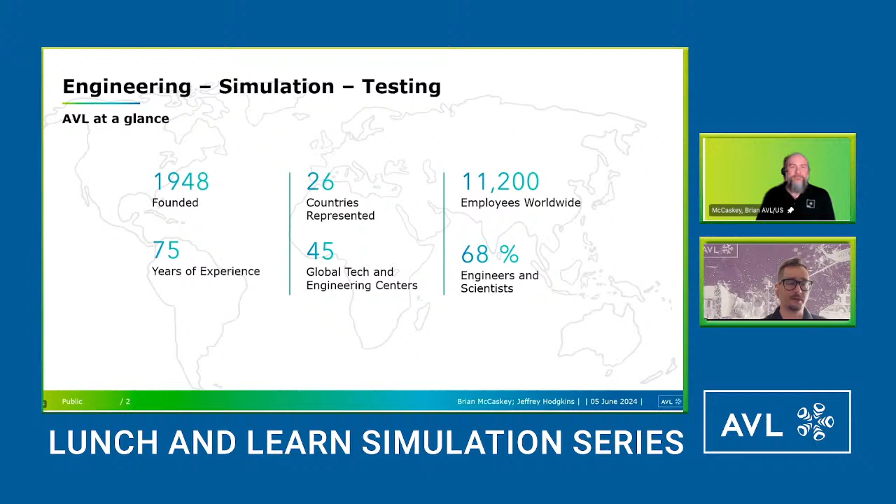Let's jump into the topic with a quick overview of AVL, who we are and what we do. We are a very research focused company, 68% scientists and engineers with 75 years experience in the mobility industry and beyond. We are all over the place, and Brian is joining us from the Plymouth, Michigan office today. We are both with the simulation group, and we have a quite large portfolio of tools you can try. But today specifically, we will be talking about a problem that we solve in AVL Excite. AVL Excite is a multi-body mechanical simulation tool, very established in the market, and we will be talking about a noise problem.

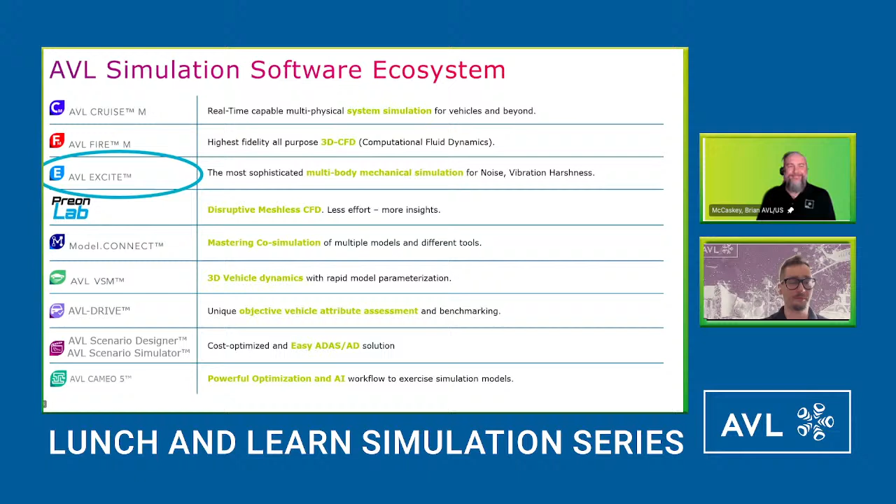Thank you, Jeffrey. Glad to be here today. Just a little bit of an overview here: I'm going to talk about the big idea for today, discuss a few of the Excite-M features and results, show the Excite-M model for this particular exercise, some of the results, and then go into some of the post-processing options we have within our tools for root cause analysis.

The point of this presentation was that we combined forces with a company called VI-Grade, who have an NVH simulator. We conducted this simple exercise to prove out the transfer of Excite NVH results to VI-Grade to be able to auralize the noise results.

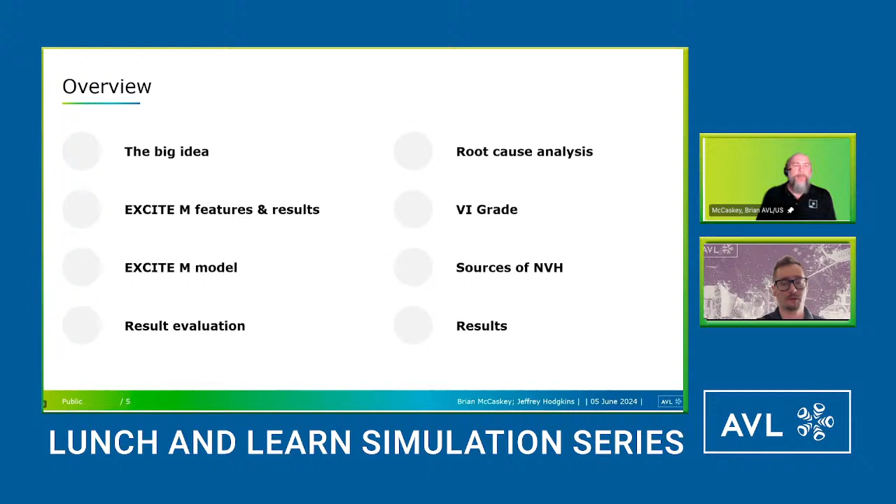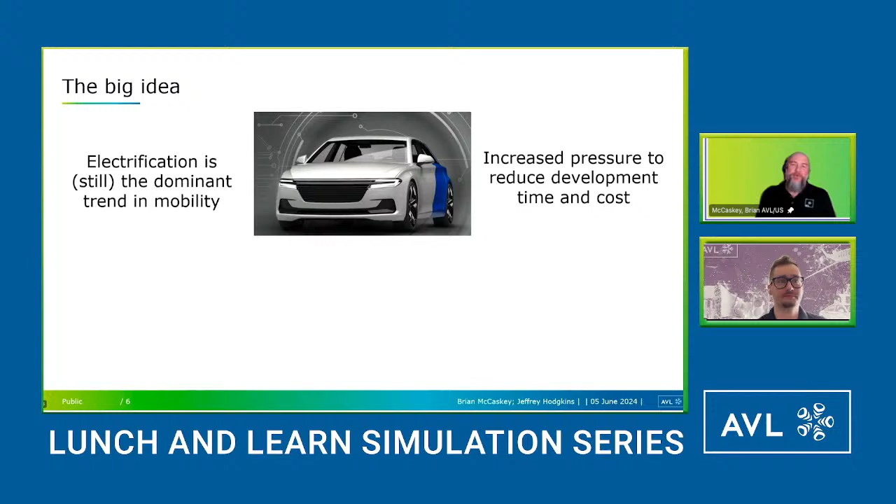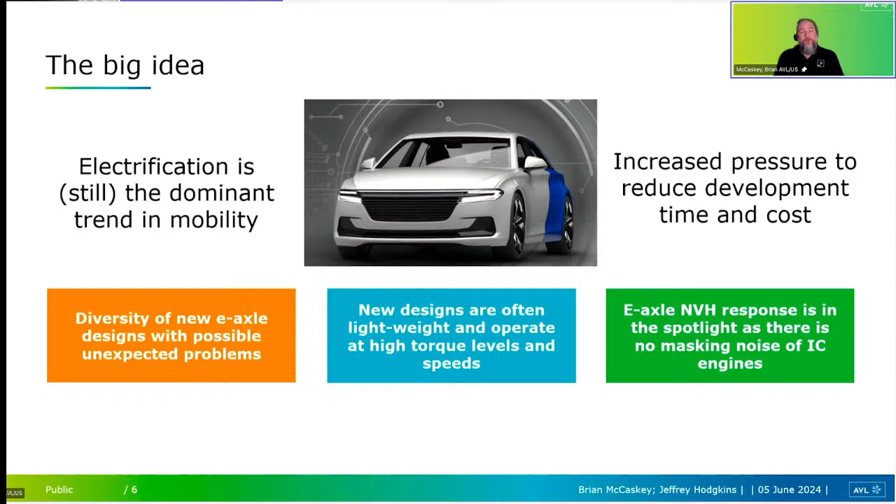Thank you, Brian. So the big idea: whether we like it or not, electrification is still the dominant trend in mobility. With that comes increased pressure to reduce development time and cost. The diversity of new e-axle designs brings unexpected problems, things we haven't really thought about yet because this is a new sector for many of us. These designs are often lightweight and operate at high speeds and high torque levels, which can have their own associated problems. Because we aren't masking these motor and transmission noises anymore with internal combustion engine noise, the NVH response is now very much at the forefront of these development tasks. So what we need is a simulation approach that can accurately capture the dynamic effects of e-axles to overcome these challenges in electrification.

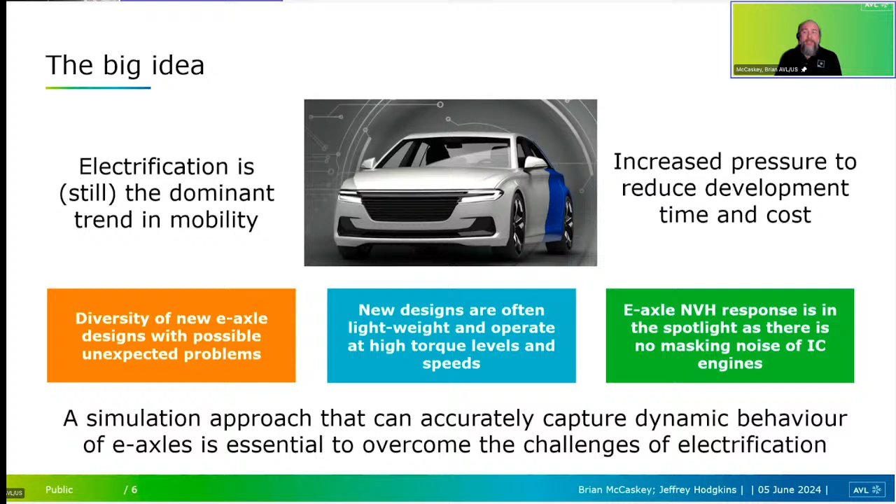Engineering: old is new. I've been an engineer for 30 years, and for those 30 years I've been leveraging development and technologies that have come from over 100 years of development in the internal combustion space. It's exciting to be in this new frontier of technology, because we are on the cusp of developing new technology that will be moving forward for the following decades, and it's nice to be at the beginning of that.

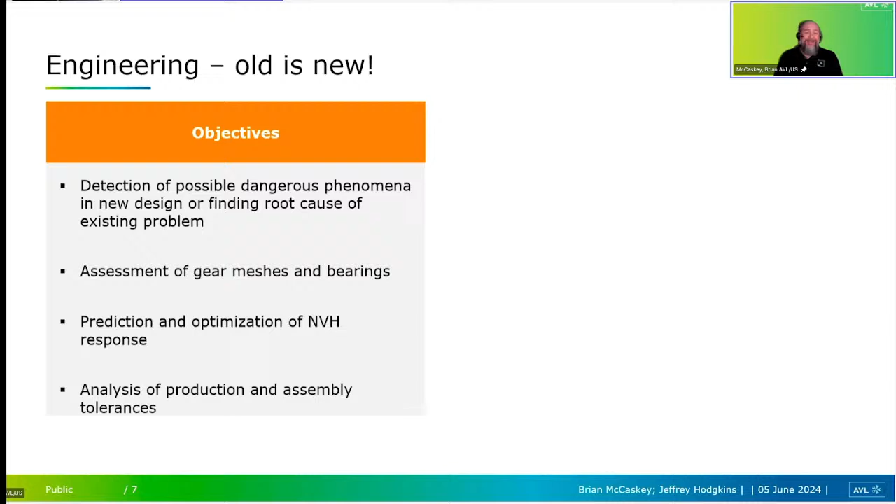Some objectives we want to achieve while developing these techniques: we want to detect possible dangerous phenomena with these new designs and find the root causes for these problems, since this is a whole new ballgame for many of us who've been in engineering for 30 or 40 years. We need to assess gear meshes and bearings, and we need to predict and optimize our NVH response, understanding where these sources of noise, vibration, and harshness come from. Finally, because we have many problems with production and assembly tolerances, this is an area we also need to evaluate and include in our simulation models.

So, of course, benefits from this mean that we can increase our confidence in our designs way before we even produce any kind of a prototype. Again, in my old days, I remember that just putting together a mock-up of an internal combustion engine was several $100,000 just for one engine. I'm sure it's much more expensive now.

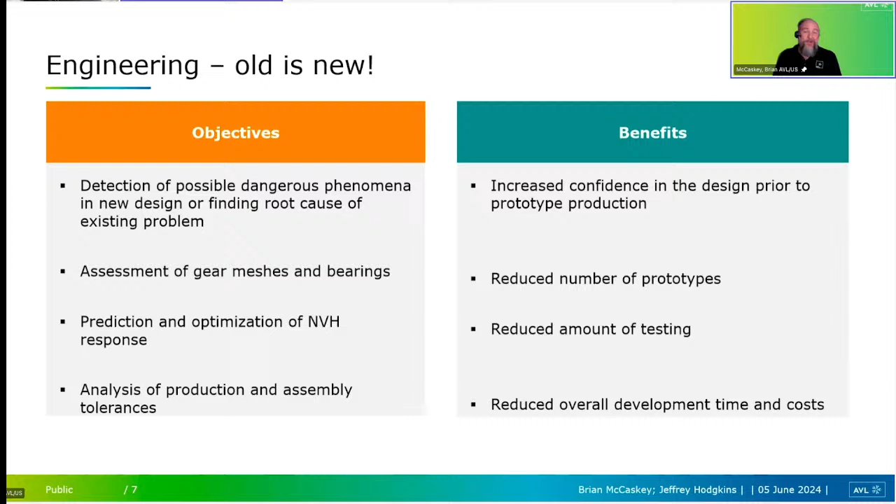So we can reduce the number of prototypes because of this. We can also reduce the amount of testing as well. Of course, that reduces overall development time and development costs, which is an important part of what we're doing in the engineering space today.

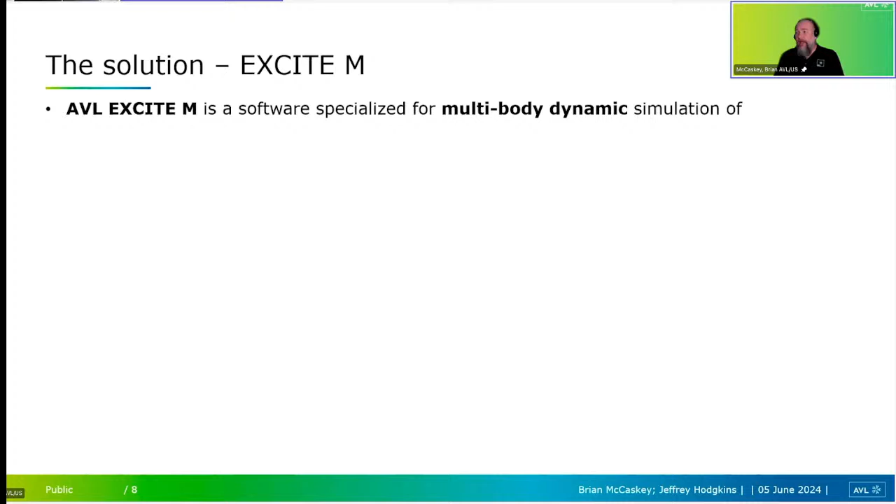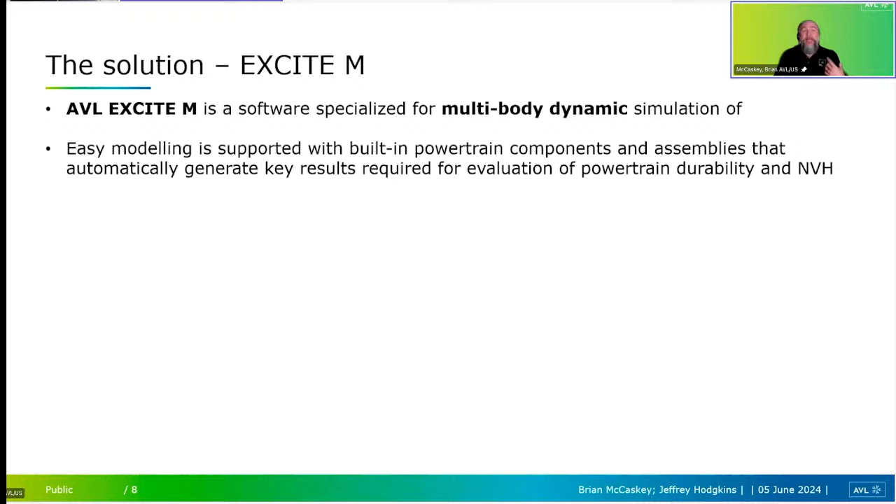So the solution that we here at AVL have is called Excite-M. Excite-M is a software that's specialized for multi-body dynamic simulation of powertrains. We have easy modeling that's supported with built-in powertrain components. We have assemblies that can automatically generate key results that we need for our powertrain durability and NVH.

And then, of course, because we started out in the ICE space and we have expanded into the electrical space, we can evaluate any kind of powertrain system. So whether it be pure ICE based, some hybrid, or even a pure electric powertrain, we can simulate that as well. And these are some screenshots coming directly from our tool.

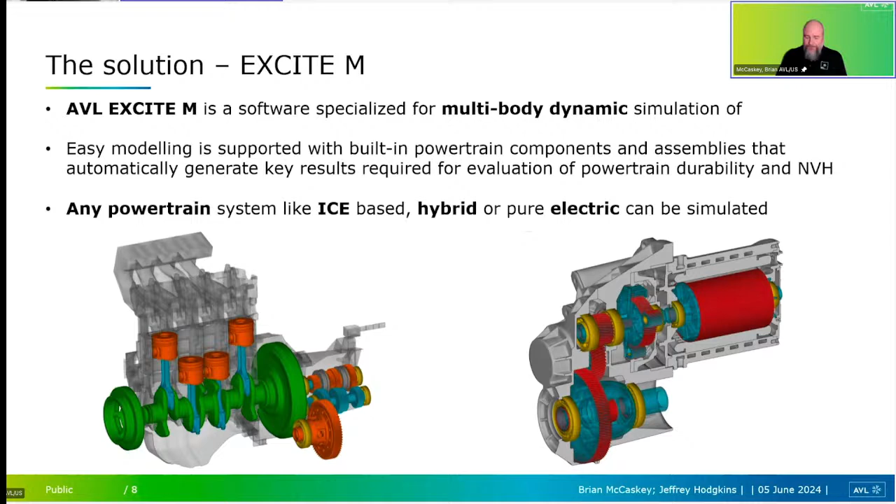So Excite-M allows us to create the so-called virtual twins. And this virtual twin is a high-fidelity dynamic simulation model. It allows us to be able to optimize and validate things in the virtual environment, which, of course, is going to save us time and cost.

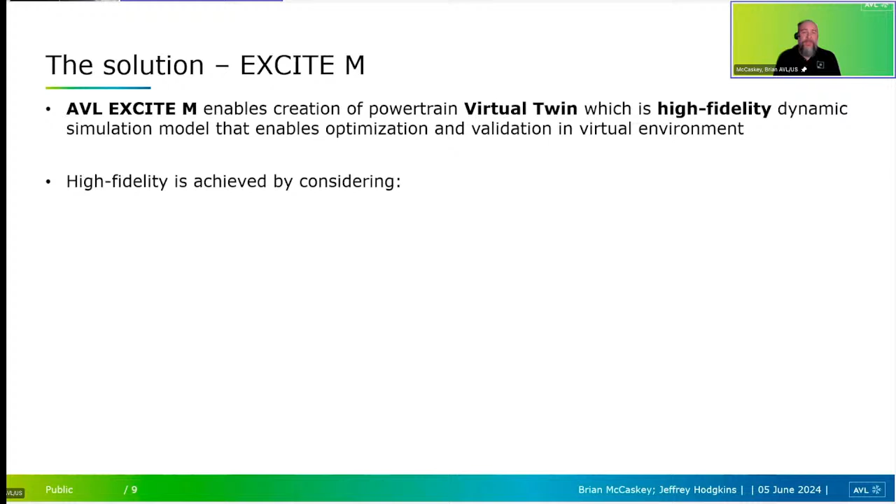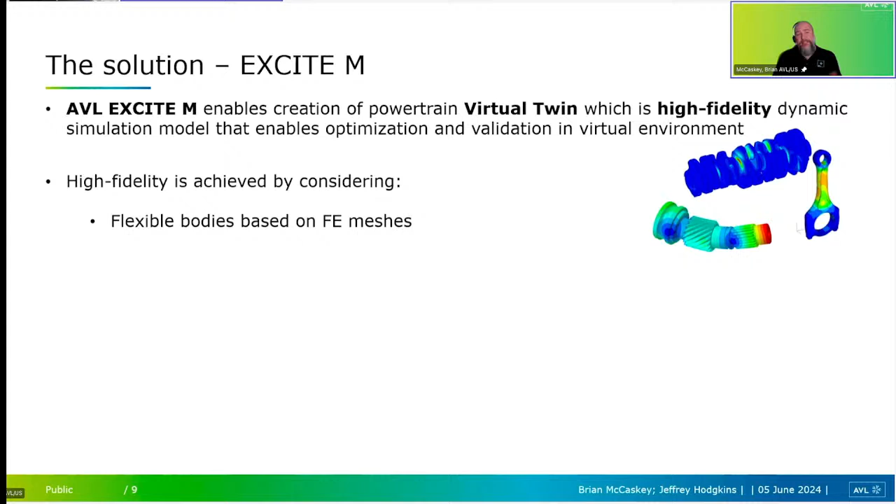So how do we do this? We do this by using fully flexible bodies based on finite element meshes. So you can see on the right-hand side, we have several components where we do some work inside one of the FE tools to provide this information as input to Excite. We have a time domain solver that enables us to investigate all the nonlinear interactions, whether they be from the gear contacts, oil film bearings, or other components.

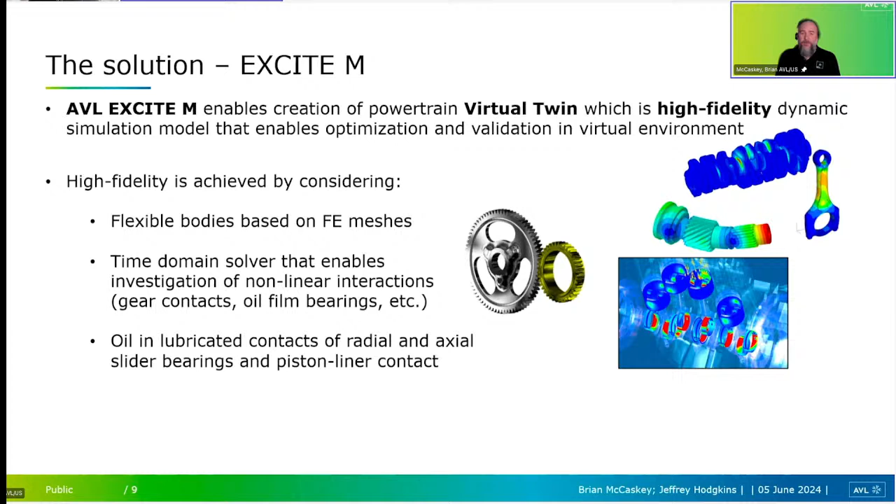We can also consider the oil in lubricated contacts for radial, axial, and piston liner contacts. And then finally here, we can consider the electromechanical interaction within e-motors as well, which is, again, something we're really focusing on in the mobility space today. And just to be clear, all these effects are considered simultaneously in the AVL Excite-M dynamic simulation, just as it's occurring in the real-life operation.

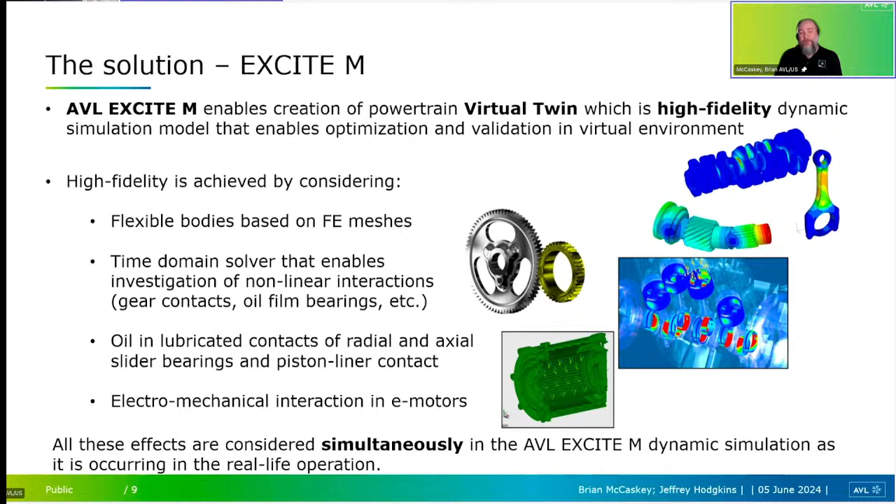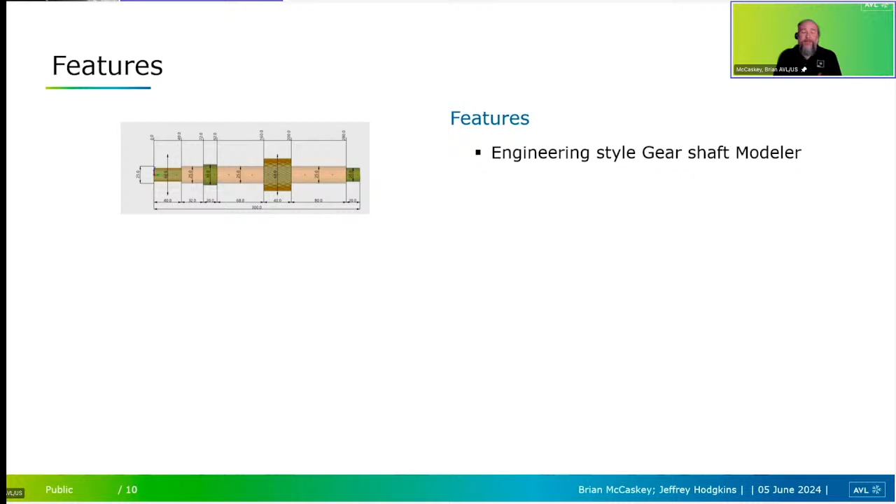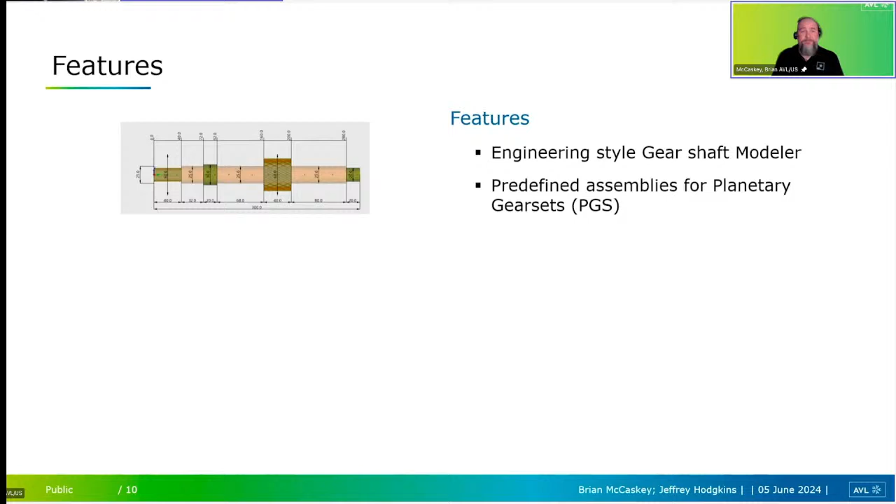So what are a few features of Excite? So Excite has an engineering style gear shaft modeler that allows us to define our properties, our assembly dimensions directly like we would see on a print. We also have the ability to insert predefined assemblies for planetary gear sets or even internal combustion engine assembly. We have preset internal geometry that's based on boundaries and reference dimensions.

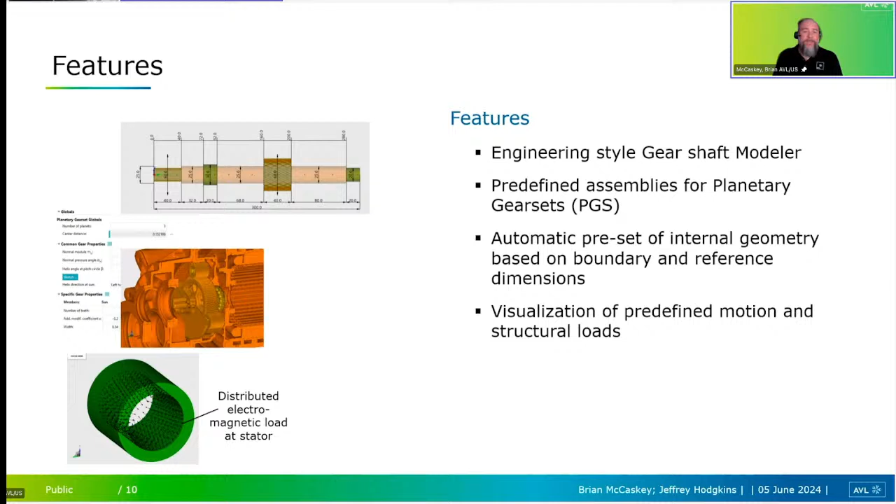We're able to visualize predefined motion, be able to look at these structural loads. So we can see in the animation here, the kinematic animation of our planetary gear set under operation here to give us an idea of whether we've got our initial conditions and our boundaries set up correctly for this particular simulation. And then down below, we have our distributed electromechanical load specified on the stator.

And then also another nice feature is we have so-called focus and context view technology. So we can look through slices of our components to be able to see what the dimensions are and be able to change those very easily and quickly and get immediate 3D feedback in our viewer.

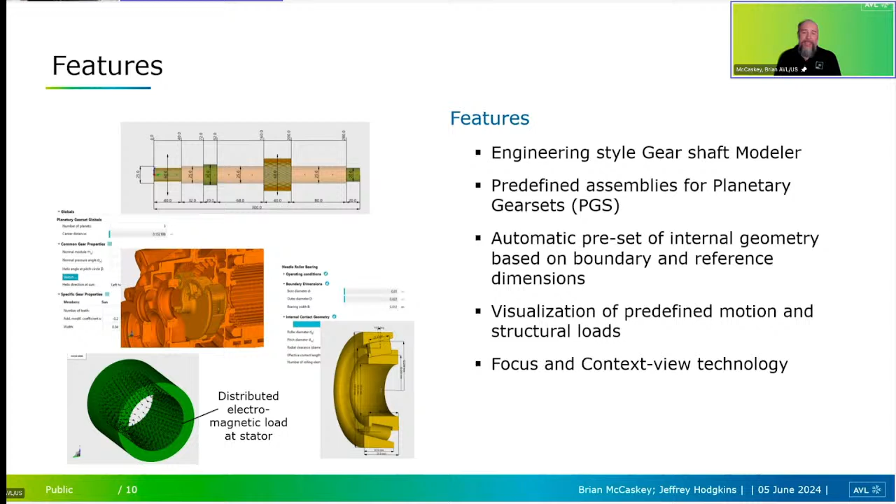So the next question, of course, what are some of the main results that we can get out of Excite-M? So from an NVH standpoint, we can specify virtual accelerometers and be able to measure the acceleration at specific points to be referenced to, let's say, real testing locations on our testing facility if we need to. We can consider coupled bending and torsional vibrations and be able to get those out of the simulation. We can look at mount bushings and vibrations.

We can consider the rotor dynamics, structure-borne noise, what are the velocities and accelerations of the structure, and then also the airborne noise as well. So we can see here on the right-hand side, we've got some screenshots showing some structure-borne noise of a housing of a motor, and then showing the overall airborne noise that's just emanating onto this 1 meter sphere in space.

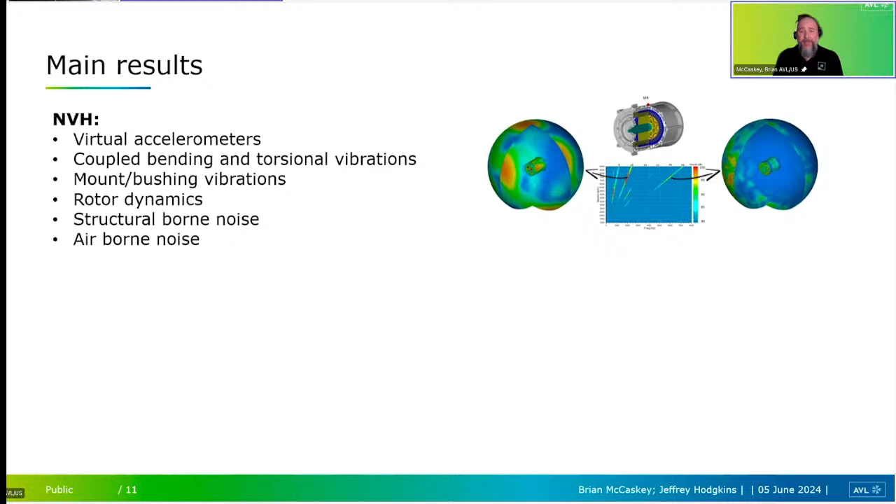Other things we can consider are the gears. So we can consider gear meshing forces. We can consider rattle, whine, clonk. And you can see on the right-hand side here, we have a nice Campbell plot showing the effects there, showing rattle in the wider frequency range, and then, of course, seeing whine in that single narrow band range.

We can consider dynamic transmission error. We can look at loaded tooth contact analysis and also consider power losses.

And then finally, just to round this out, from the bearing standpoint, we can examine bearing forces and moments. We can look at raceway deformations and also see power losses. And we can see on the right-hand side again, we've got the radial contact forces at the rollers themselves. And we can also look at the order plots to see where the transmission error and forces are coming from.

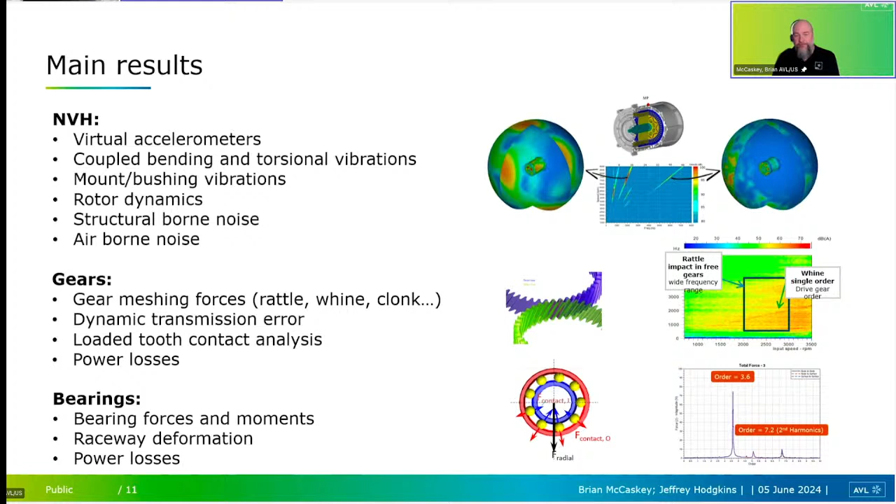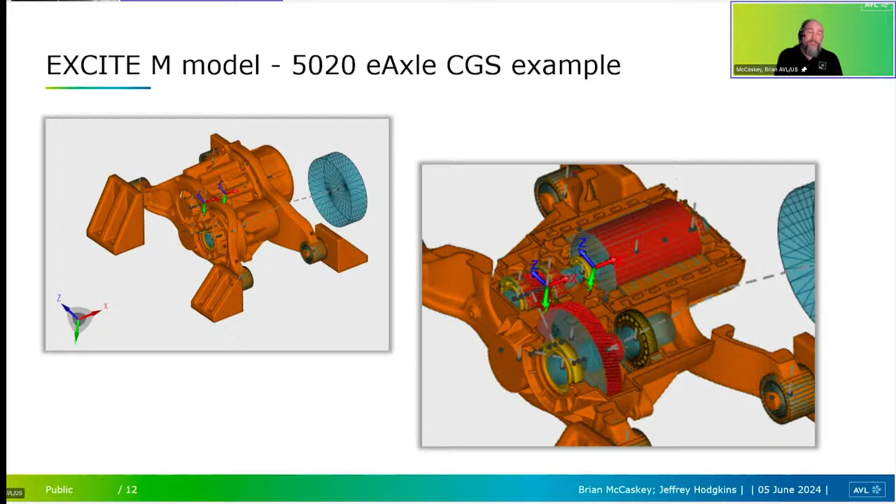We've got an electric motor. We've got a 2-stage gear here, and then, of course, we've got a dyno-type driver on the outside that's moving this at a specific speed. So, as I mentioned, it's a 2-gear reduction, and what I did is I utilized a single loading condition and ran this from 1,000 RPM to 9,000 RPM at 1,000 RPM increments, and I used 2 different variants.

So one of the nice things about Excite is that you can easily change the microgeometry of the gearing to be able to see what the influence might be. So in the base model, I used just regular gear geometry as it would come machined, let's say. And then I used a secondary variant, which was gear crowning with a microgeometry of 3 microns. And what I wanted to do was to really see within Excite, just with this basic model, what is the impact going to be of this modification?

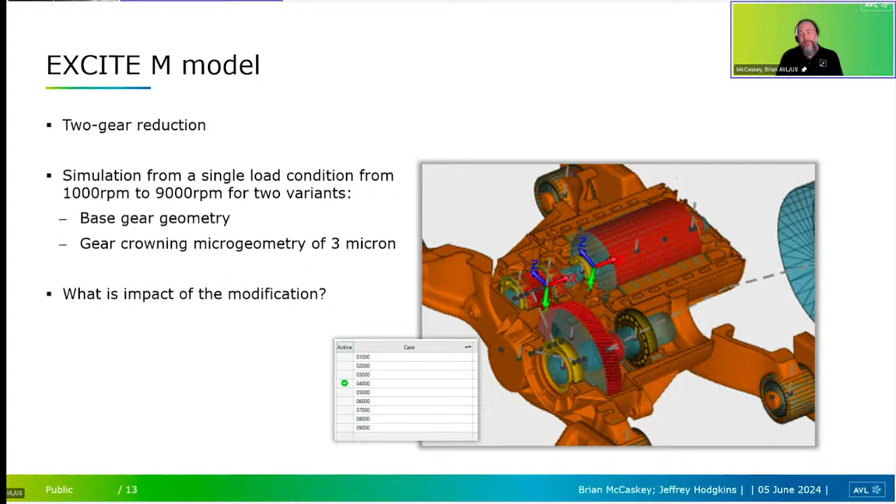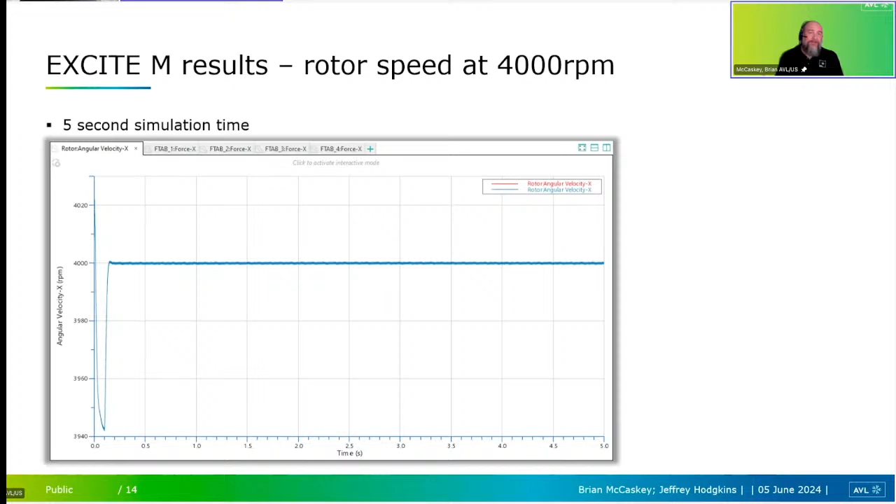So here's just showing you the rotor speed at 4,000 RPM. I just chose a random speed here just to show the result that once I got through my initial conditions, after a few milliseconds, the simulation was steady state up until the 5-second range that I ran the simulation under. And what I wanted to do is to be able to export the mount excitations and provide those to VI-grade for this exercise.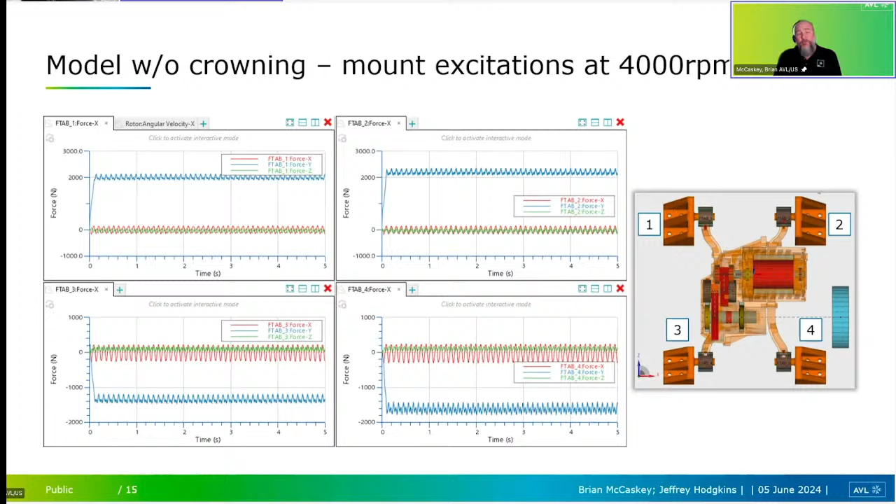And if I move to the model that had the crowning, you can also see that the forces are very, very similar. So at least this gives me some confidence that I don't have anything wrong in my model and that really the microgeometry isn't affecting something on a very large level. So I want to dive into that a little bit deeper.

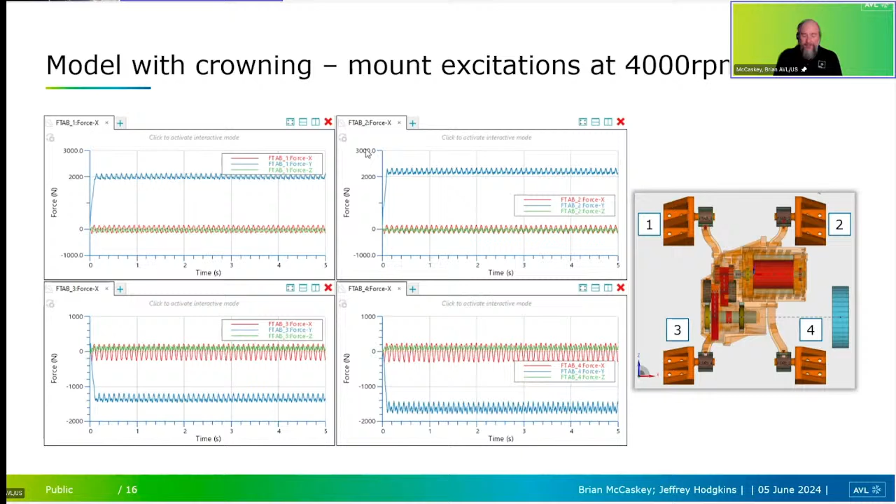So that's kind of where I wanted to place my focus and say, okay, what if I look at the results that have the crowning included? Can I really see over the frequency range some differences there? So the next slide here shows that, and you can see for the 14.64 order that there is some decrease there. And for the 27th order, you can really see that the order content there has reduced fairly significantly, at least from the eye standpoint.

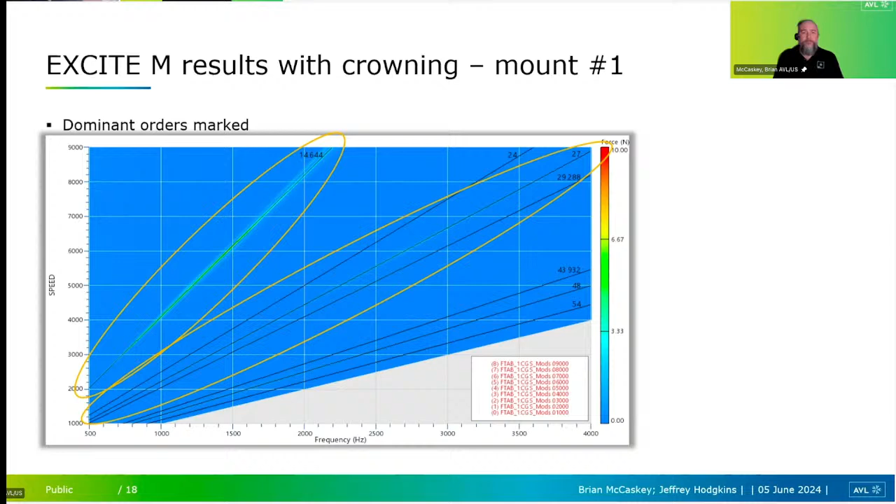And I can go further and look at order tracking. So I can track those individual orders for both the baseline and the modified gear tooth microgeometry. And I can see that there were some differences between the baseline and the modified example. So again, I can have some confidence knowing that I've had some impact here in my simulation to better the whine noise that's in this model.

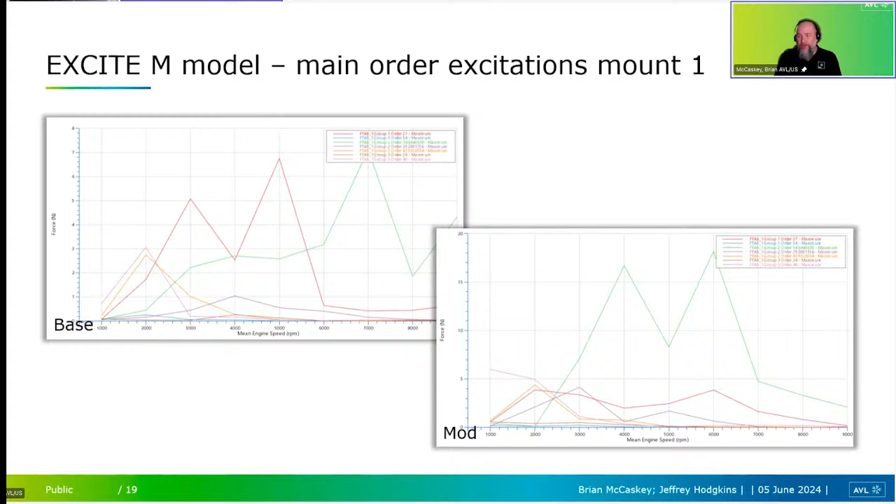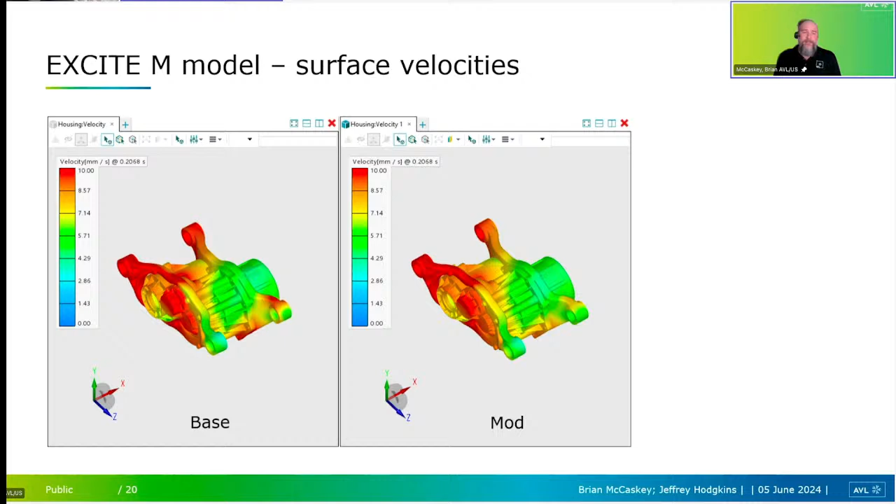And furthermore, I can look at the animation, the 3D animation within our post-processing tool. And again, with this, you can see the baseline and the modified at just a specific point in time. And you can see at the right-hand mount point, for sure, that there is some difference there with respect to the overall velocity at that particular location. So I know that I'm getting some influence and I'm getting some benefit from utilizing this gear microgeometry on the structural vibrations.

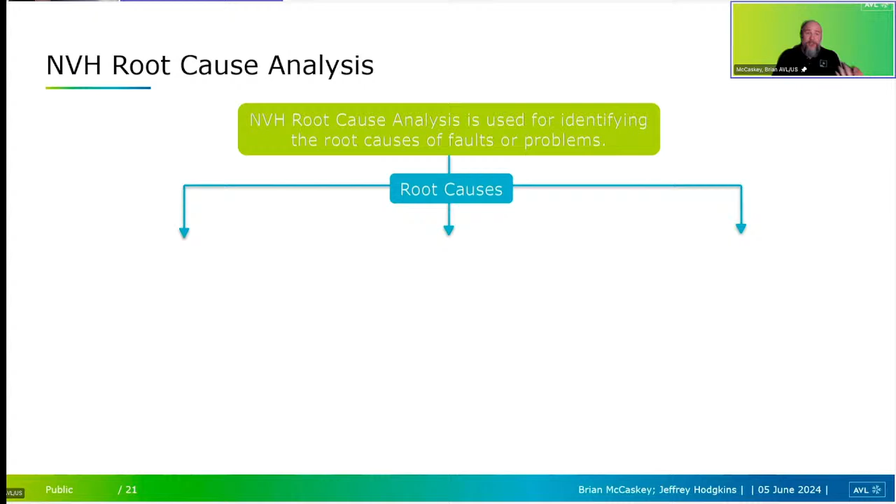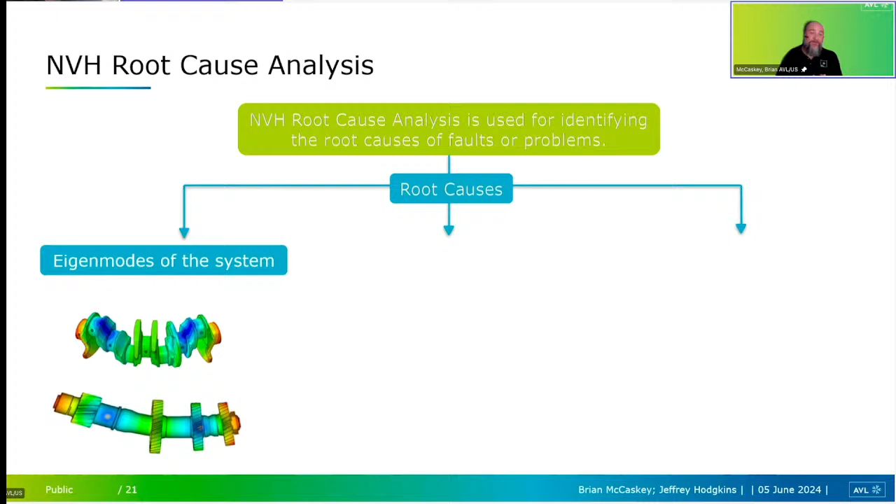So furthermore, what I could do is I could do some root cause analyses. These root cause analyses allow us to be able to understand maybe where the faults or the problems are coming from. And it can be very complicated, and it can come from several different sources. So first of all, it could be coming from the eigenmodes of the system. It could purely be coming from some resonance point with a bending or a torsional mode of a shaft or of a housing. It could be very simple like that.

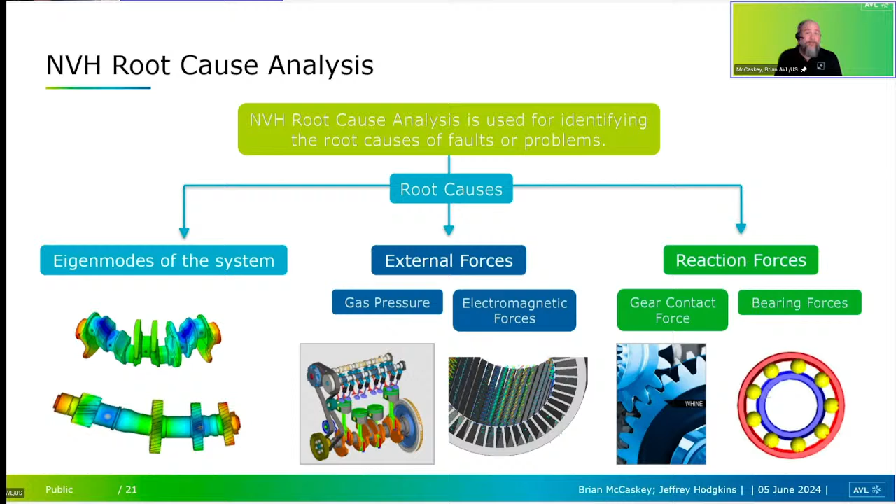Or perhaps it's coming from the external forces. In the internal combustion area, it could be coming from the gas pressures, or maybe in the E range, it's coming from the electromagnetic forces, maybe providing some ripple or some other modes in there that we're not really expecting. Or finally, it could be coming purely from the reaction forces. Maybe it's in the gear contact force. Again, we've been talking about gear whine. Or maybe it's coming from the bearing force. Maybe there's some sort of rollover that's occurring that's causing some of the faults or the problems that we're experiencing in our model.

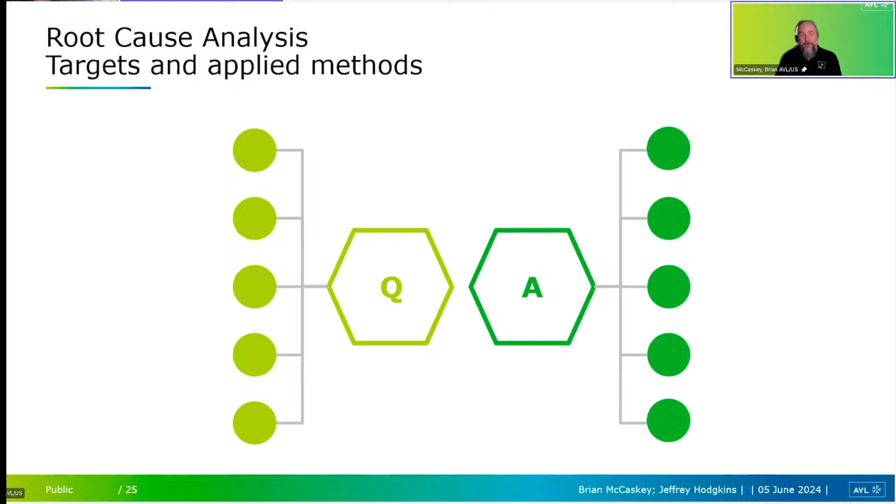And we can go even further into this. We have several different methods that we can utilize within AVL to dig down and try to understand where these root causes are coming from. So, for example, what is the deformation shape of the resonance itself? What we could do is a so-called operational deflection shape analysis. And what this does is it allows us to look at the actual bending and flexing of the component, whether it's the housing or the entire system, to see really what is affecting a particular portion of our model.

We could also look at what excitation path is causing the resonance. We could do a numerical transfer path analysis and really dive in to see what modal content is really driving that resonance that we're seeing. Another thing we could look at are the eigenmodes. What is happening at the resonant frequencies? We could do an operational modal analysis and really deep dive into the structure and see exactly what's going on there. Or even on a system level, what mode is contributing the most on the resonant vibration.

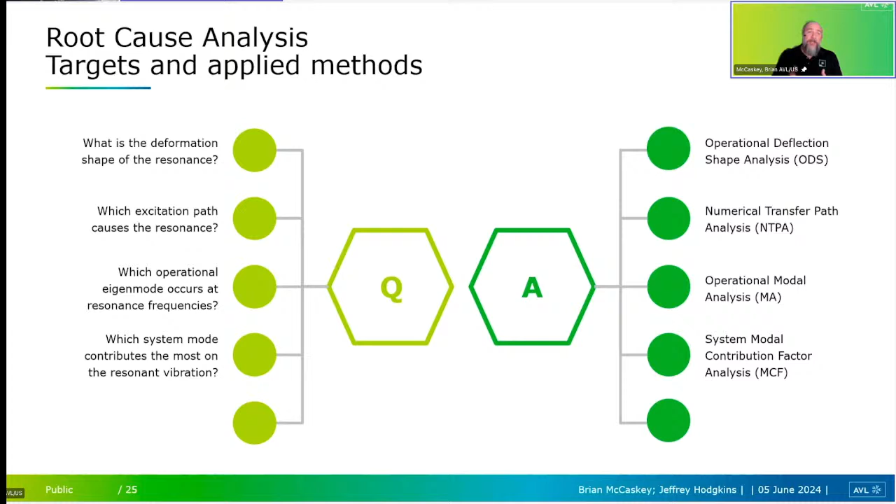So we could do a system modal contribution factor analysis where we can actually look to see what dominant mode is affecting the result of our simulation. Or finally, what component mode is contributing the most on this resonance. So we could do a modal contribution factor analysis as well. So these are just a few of the tools that we can use from a post-processing standpoint to be able to understand more clearly what is going on with our simulation model.

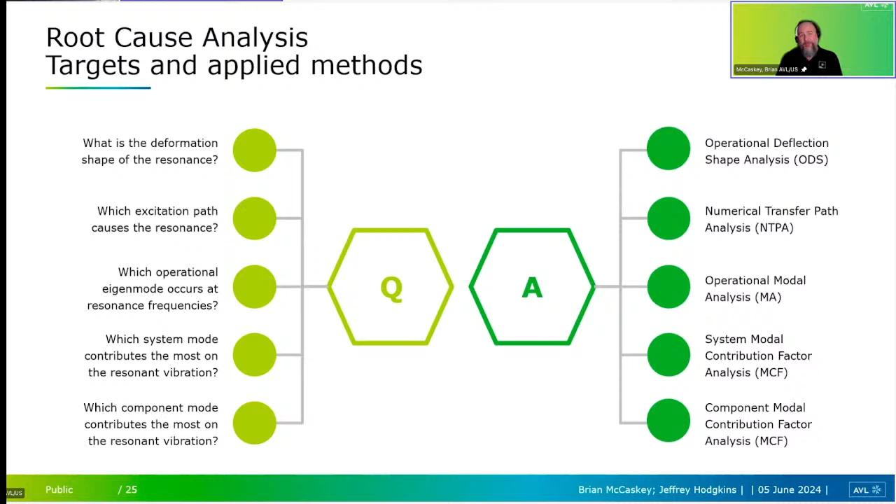But when we get to this point, we kind of asked ourselves the question, and this is where we transition a little bit into what VI-grade can offer. What do we do next?

The whole idea was to try to auralize, or be able to hear by ear, what the Excite-M model was doing from one baseline model to the optimized model with the gear profile modifications. So again, we connected with VI-grade, and their mission is to help customers with zero prototypes.

So a little bit about NVH. This came from our friends there at VI-grade. Basically, there are several different areas where we see automotive sound and vibration, from 0 hertz up to 20,000 hertz.

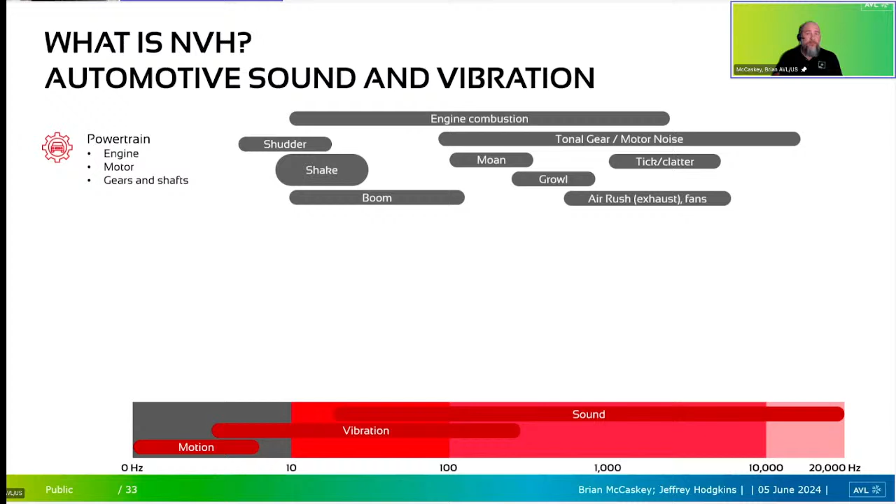What we can see here is that in the powertrain, we typically have these type of responses that are dominating. Maybe it's engine combustion, maybe it's tonal gear and motor noise, maybe it's boom, shake, or shudder - all these things that we've heard about in our engineering days.

Or maybe it's road noise. Road noise is a big thing. It could be coming from the tires and the tread, or from the structure-borne sound and vibration, or maybe some imbalance.

And then finally, wind noise. Wind is another thing that we don't really think about when we're driving, but really we get that whistle, or we get that effect that happens through maybe our trim package, for example. I've got an older vehicle, and it's very noisy - I can really hear the wind some days.

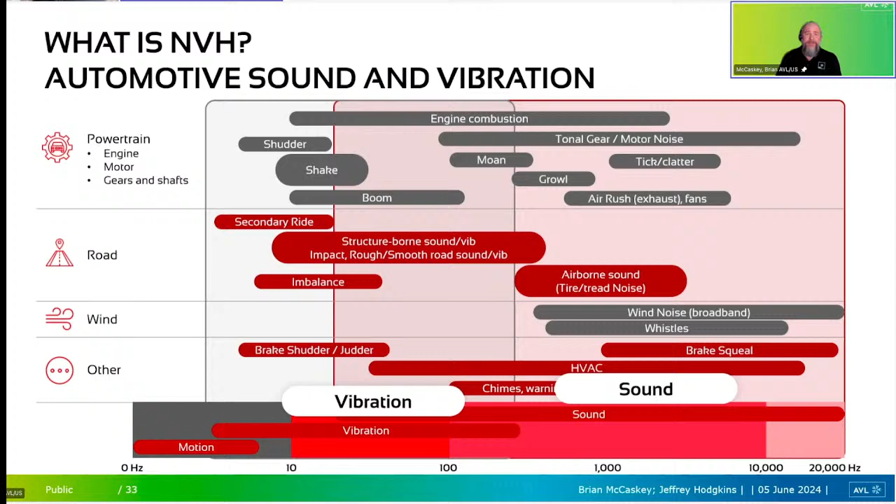And then finally, brakes, squeals, HVAC, chimes, warnings, communications - all these things are contributing to automotive sound and vibration. Primarily from a sound standpoint, we have this area on the right-hand side, which are mainly your higher frequency orders. And then on the other side of it, we've got vibration. There's a little bit of overlap, up to maybe 100 or 500 hertz down to zero for motion, and those are really where our sound and vibration are coming from.

So why is this important? Of course, today especially, if you think about it, think about a Harley Davidson or think about a Mustang. They have a very specific sound that feeds into their brand DNA that they really want to try to deliver. When you hear something going down the road, you're like, oh, that is exactly a Harley Davidson, or that's a Mustang or whatever.

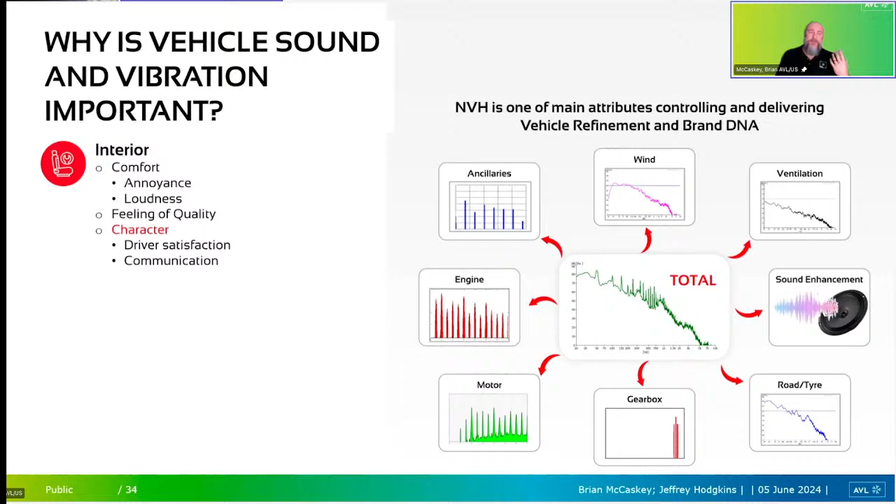That's really where today we have to be careful, because there are not the typical sounds that we get anymore. So again, because we don't have that masking, we have to really consider the interior noise of our vehicle. What is the character? Are the drivers satisfied? They feel like they're in a quality vehicle.

On the exterior, what does it look like, as far as the character goes, the soundscape? What kind of pedestrian warnings might we have? And then, of course, vehicle NVH, because this all affects our buying decisions, satisfaction, warranty, loyalty, and repeat buyers. So all these things play into the whole idea that sound and vibration is really important to the consumer.

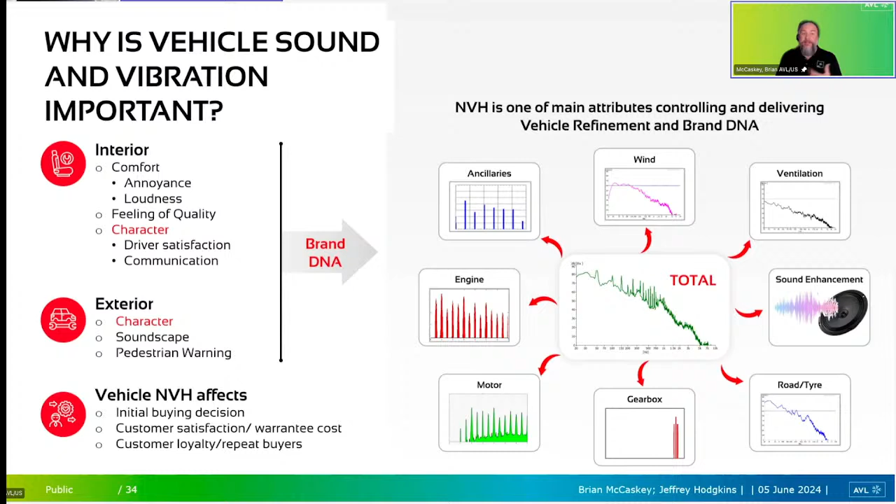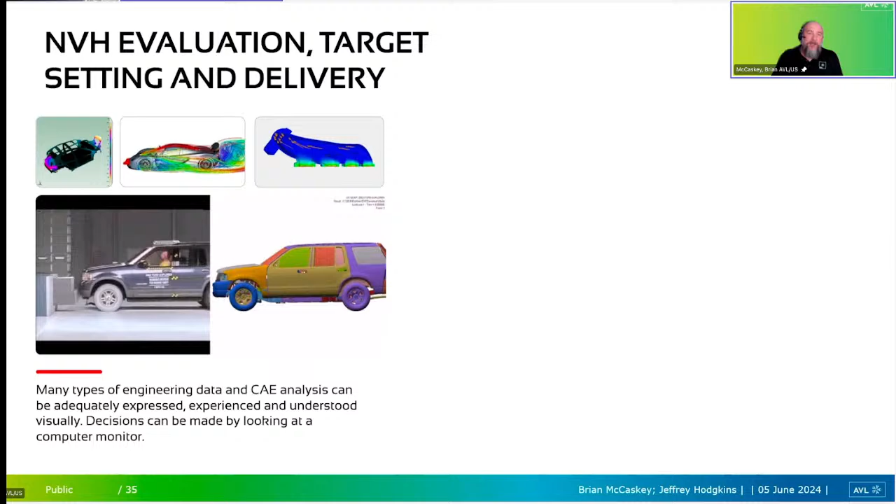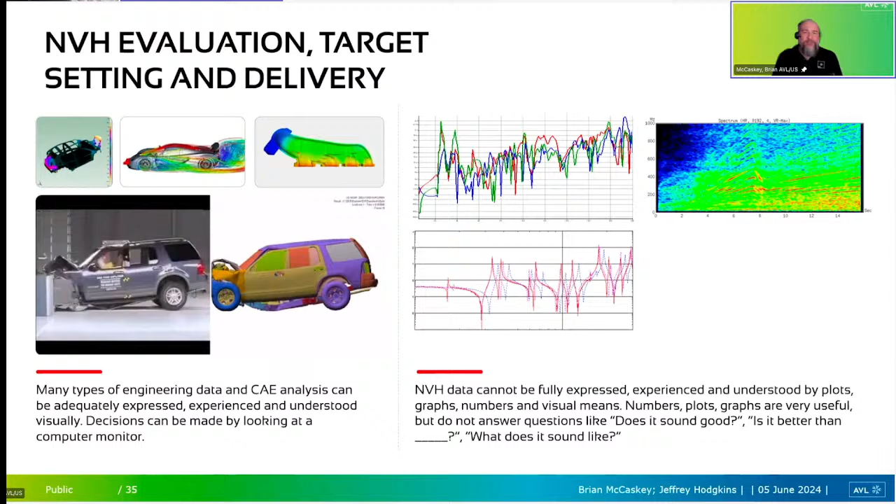So the whole thing here that we really were trying to work through is that NVH data really can't be fully expressed, experienced, and understood by plots, graphs, numbers, and visual means. They're really useful, but qualitatively, what does it mean for us? Does it sound good? Is it better than the previous design? What does it sound like? And that's where VI grade came in on this.

So what they did is basically we wanted to evaluate our design without a physical prototype, and be able to provide some interior e-motor sound at the ear to get some idea of what kind of noise we were experiencing, and how we were doing with the variant from the baseline to the one that had the gear microgeometry.

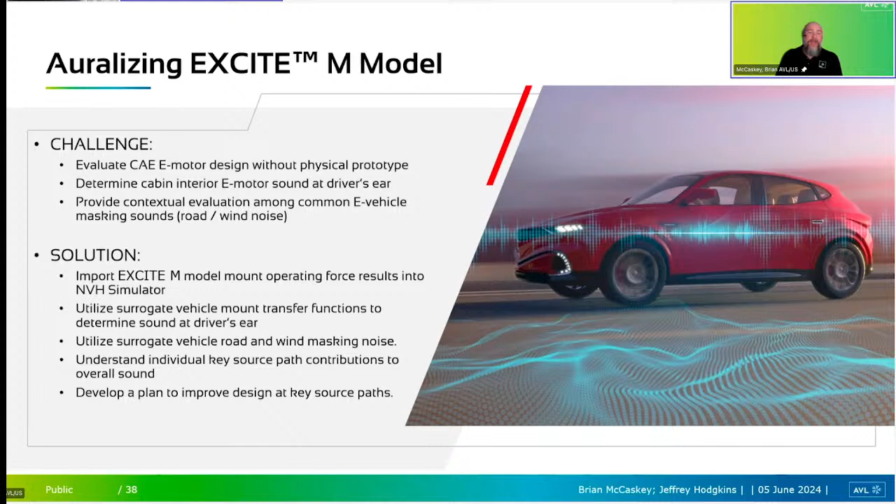So what we did: I provided VI grade with some mount operating forces. They imported those into their system, and then they also applied some surrogate transfer functions, road and wind masking noise, because that wasn't something that we had available, but they had such things available from some generic testing that they had. And then what we wanted to do is develop some plan to improve the design.

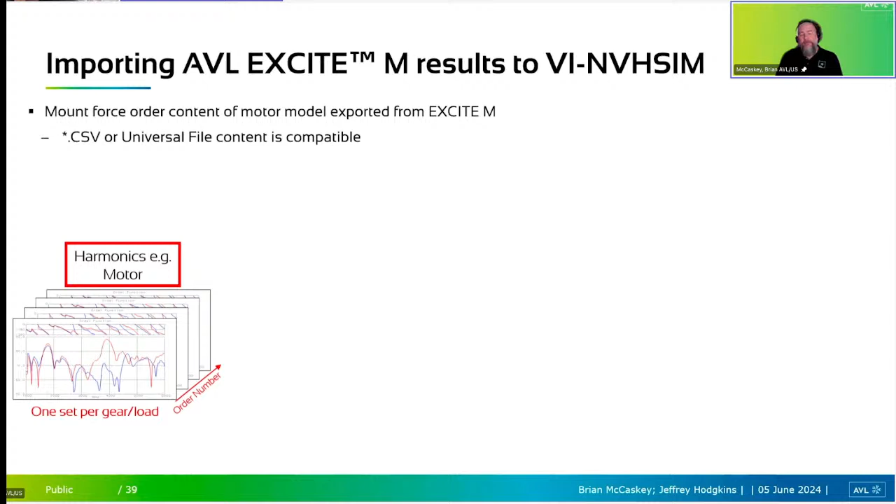So what they did, they took our mount forces, converted them from a CSV into their software package, read them into their toolbox, and then converted them into order versus RPM amplitude data into their specialized .ord file.

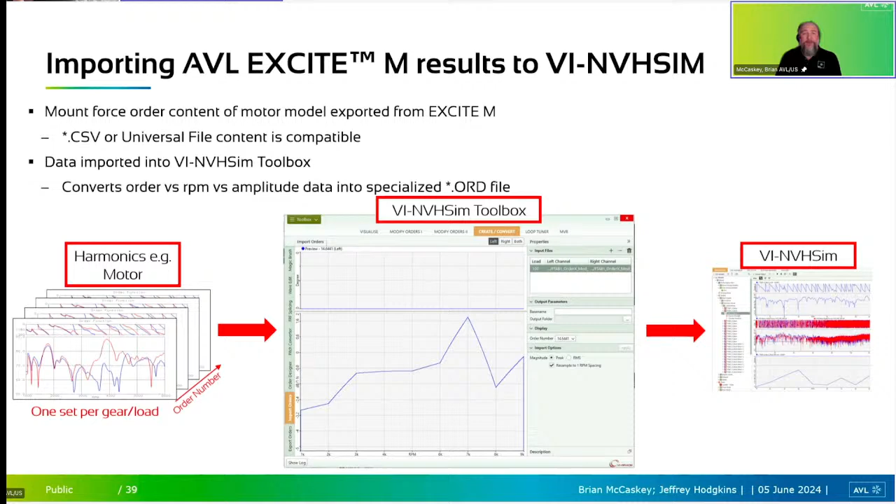And then what VI Grade did is they took all of these mount forces that they had imported from an order standpoint, they combined them with the driver transfer functions, and then we were able to utilize these for a simulation to be able to hear what's really going on.

So I've got source strengths, transfer functions, and then the contribution coming from the actual mount itself. The nice thing was they were able to turn on and off various components as well in their software tool.

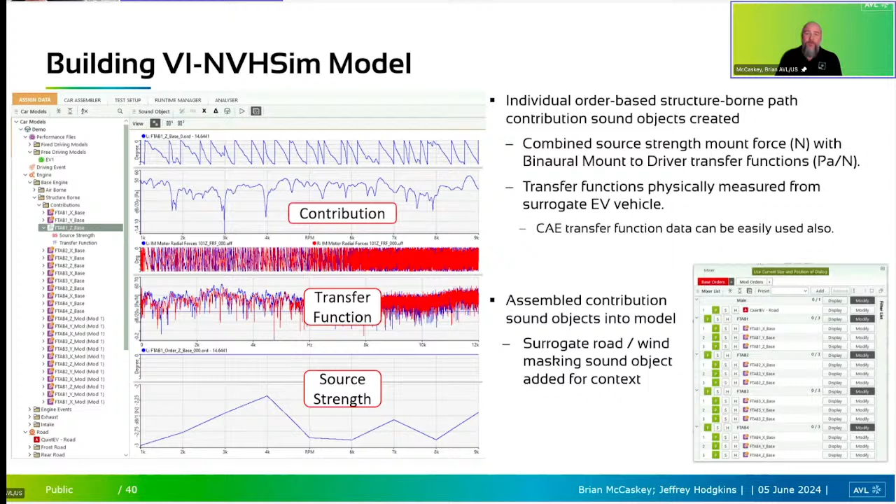So what VI Grade did is they took our model, did a virtual drive, and were able to compare the data between the baseline and the model that had the microgeometry utilized.

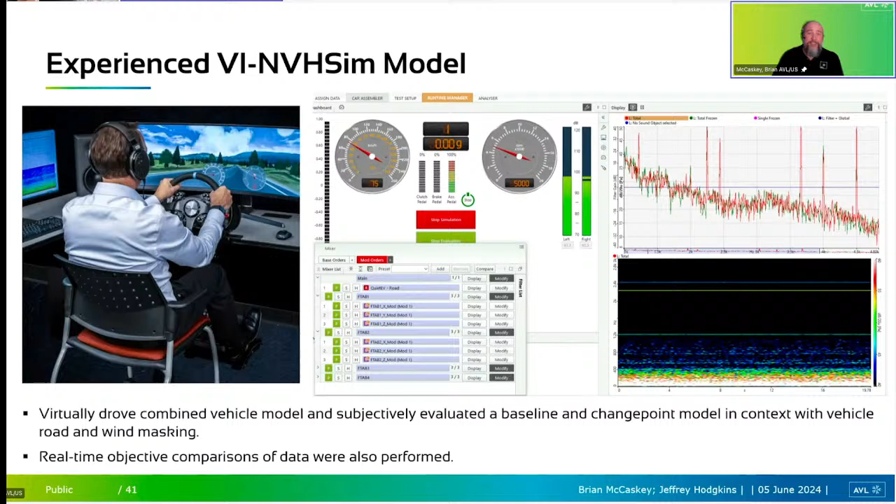So the next two slides are just going to show visually what the difference is between a model that has all the road and the wind masking included.

You can see here on the right-hand side, and there is a video that goes with this, but for the sake of time I didn't display that. Basically, screenshotting showing on the right-hand side here what the order content was over time versus frequency, and then also looked at the content data of the noise itself.

So you can see it's quite noisy as we ramp up and then ramp back down. So what happens if we remove the road and the wind masking noise? And this is the difference.

So what we could see here is the content coming from our test before and after utilizing the gear microgeometry that we included. So this is testing. I think this is the one model without the microgeometry. But again, being able to show that you can really separate the wind masking versus the noise that was coming from our mount excursions here.

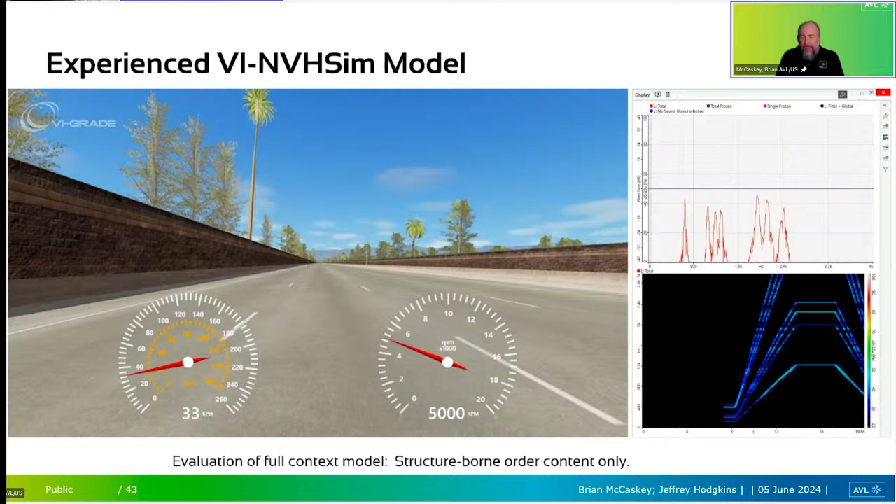So the analysis then allowed us to be able to compare both the path contributions from a transfer function standpoint and do these so-called what-if studies.

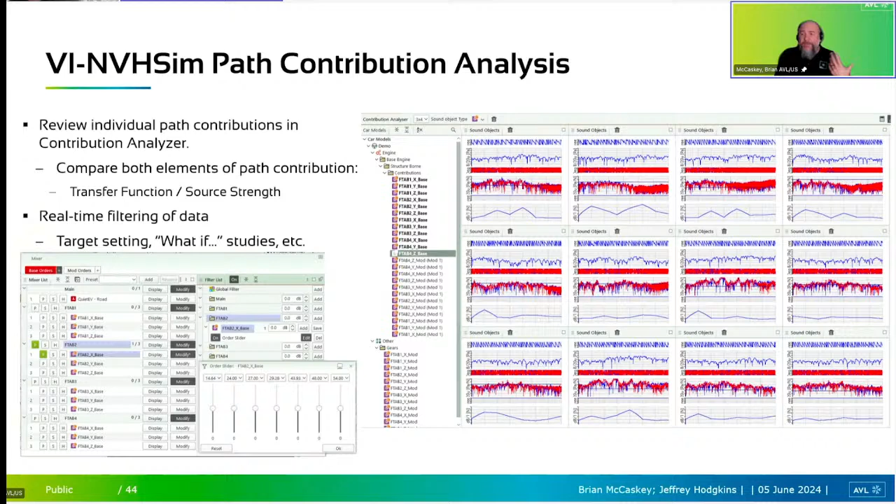So at the end, what we really proved out here was that we could evaluate NVH data efficiently using Excite-M. We could make decisions quickly and rapidly, deciding what kinds of things could potentially be problematic for us. It saves time because, of course, we now have this quick import of CAE data and this NVH evaluation tool.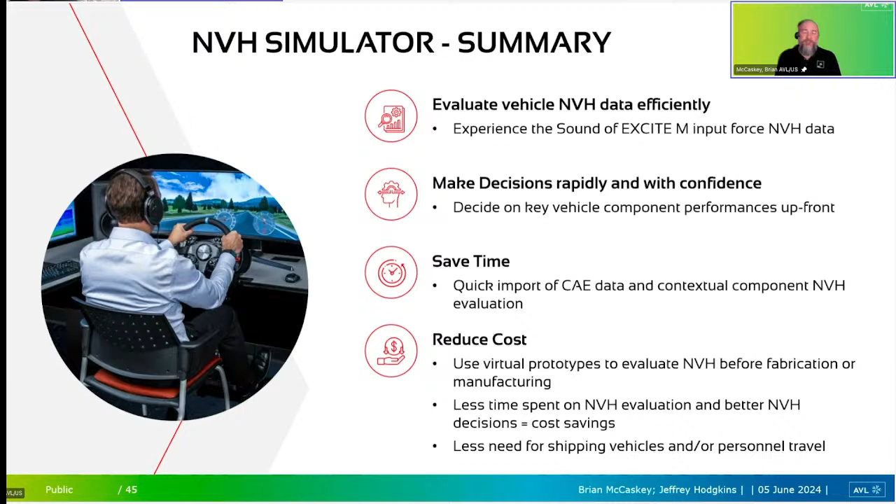And then finally, the biggest thing we're all trying to do is reduce cost, right? So we can use these virtual prototypes, evaluate the NVH before fabrication and manufacturing. And again, it just overall gives us a much more refined and streamlined process. So with that, that's the end of my presentation.

Thank you, Brian. Yeah, that was great. It's really impressive what you can achieve when you pair simulation with actual hardware, so you can experience it. In my opinion, this is always a great topic. And looking forward to the final results, to see this in some vehicles, like a couple of years down the road. Hopefully they sound much better.

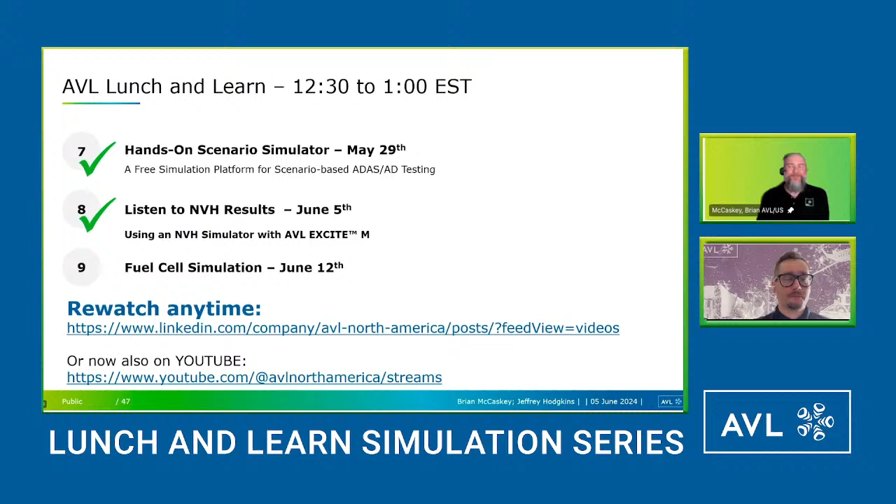Okay, we're out. Very good. Awesome.